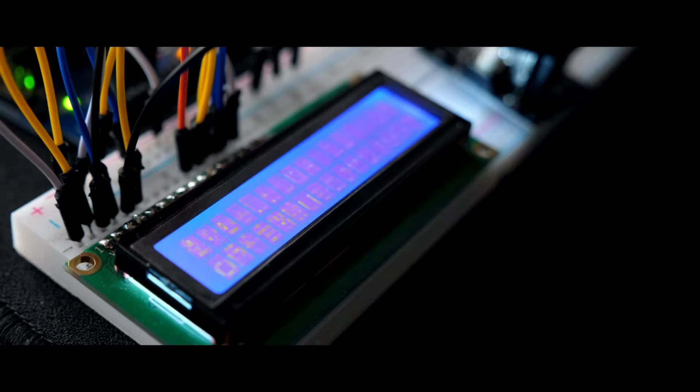Today I'm going to present the circuit of the system. To create the smart contactless mailbox circuit, we need to use a few components. The main one is the Arduino Uno. Then we need to use breadboards. In this circuit, we will use 3 breadboards. Now for the input of the system, we will use an ultrasonic distance sensor, a push button, and a 250 kilo ohm potentiometer.

Next, for the output, we need to have 5 servo motors, an LCD 16x2, a piezo buzzer and LED lights with 2 colors. To ensure all the components can function well, we need to have 3 pieces of 1 kilo ohm resistor, 2 pieces of 160 ohm resistor, 2 pieces of 10 kilo ohm resistor, and 1 piece of NPN transistor. All the components will be connected to the Arduino using jumper wires. For the power source, we need to prepare a 9-volt battery with the battery holder.

The total cost of the circuit is around RM104.90. But usually, we can get all the components in one set like this, at a cheaper price. Basically, the price of the set is 60 ringgit. Next, let me show you how to install the circuit. These are all the components that we use in our circuit.

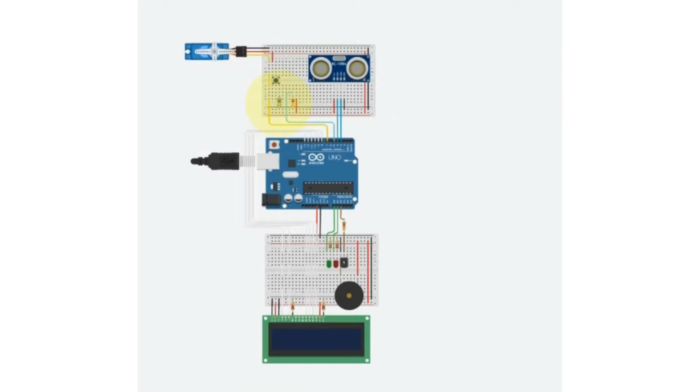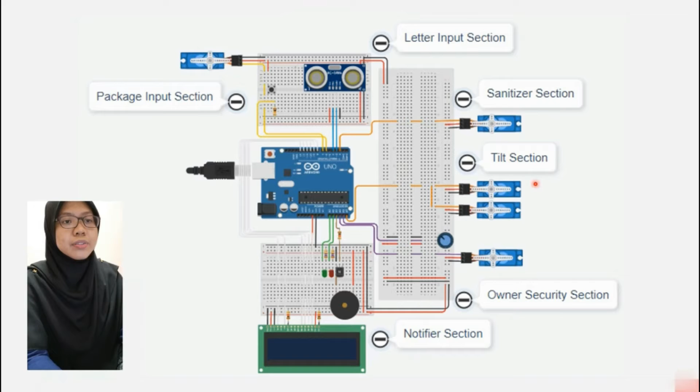Okay, now we can proceed to the installation of the circuit. As we can see here, the smart mailbox system is divided into 5 main sections. We have the input section, sanitizer section, tilt section, owner security section, and notifier section. The input section is divided into 2 subsections, which are package input and letter input. The package input is equipped with a servo motor attached to digital pin 7 and a push button attached to digital pin 6 and a 10 kilo ohm resistor.

So the other input is the letter input section, where an ultrasonic sensor attached to digital pins 3 and 4 will detect the presence of the letter. This sensor will be put near the letter slot.

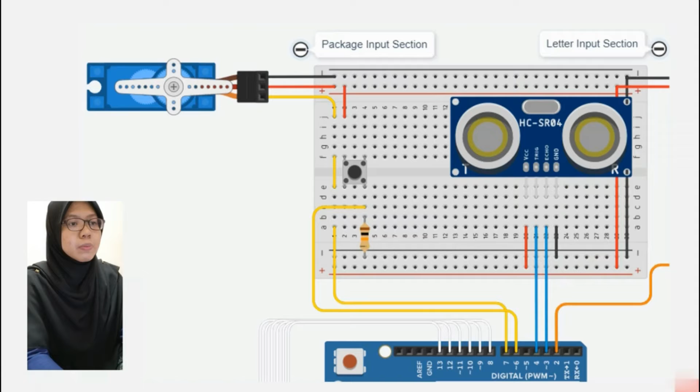Next, the notifier section. We use 3 types of notifier, which are LED light, piezo buzzer, and LCD. There are 2 LED lights used, a red LED and a green LED, attached to analog pins A1 and A0 respectively. Both LEDs are connected to a 160 ohm resistor.

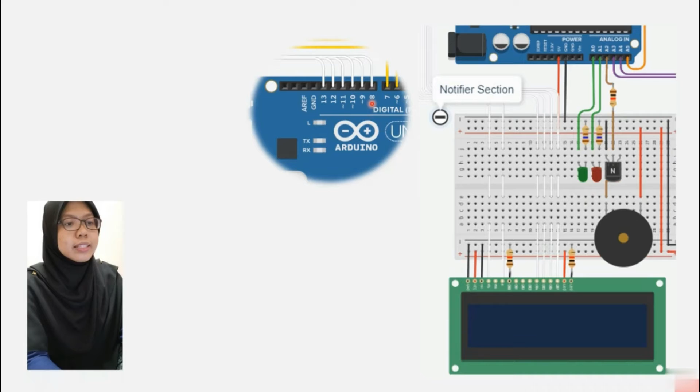Meanwhile, the piezo buzzer is connected to analog pin A2 with a transistor and a 1 kilo ohm resistor. The third one is the LCD, connected to digital pins 8 until 13. Then we continue with the sanitizer section and tilt section. For both sections, we use servo motors connected to digital pin 2 and analog pin A5 respectively.

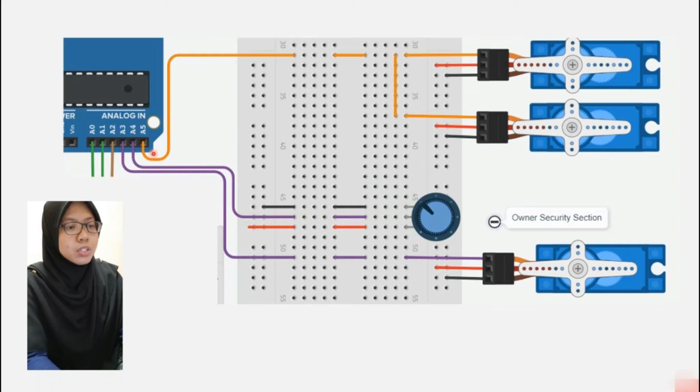Last but not least, the owner security section that will be installed in the lower compartment of the mailbox. The servo motor that acts as the lock is attached to analog pin A3, and the potentiometer that acts as the key slot is connected to analog pin A4. So let's see the full installation process of the circuit.

After that, we continue with the setup. We need to clarify the input and the output. Just to promote our system, the LCD will display the project name when the system starts. Then we go to the void loop, where the loop function will run over and over again as long as the system is on.

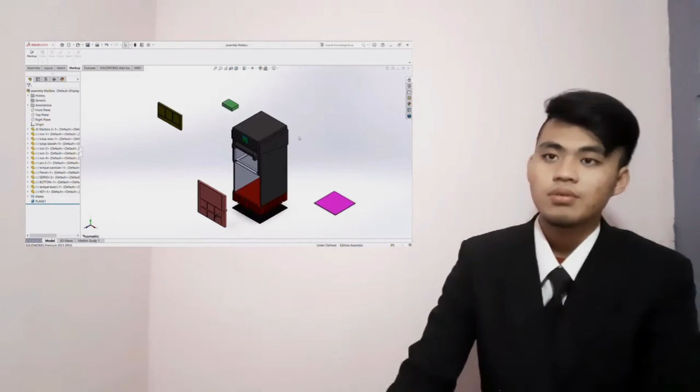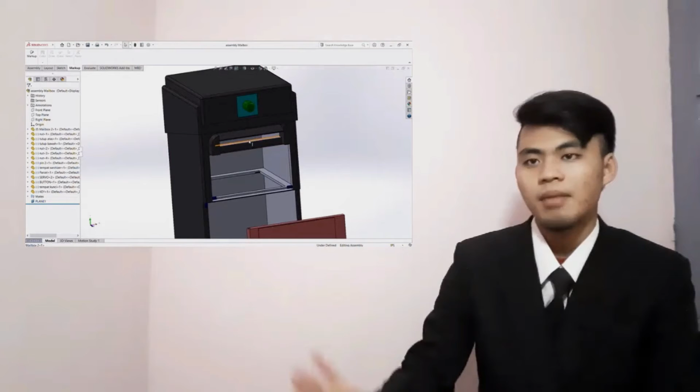The mailbox was designed like this to give the user modern looks and to ensure the postman has a place to deliver not only letters but also small parcels. It was built mostly from steel to ensure its toughness, and it was colored in a dark color.

The upper part was built for the postman to put in the letter and the small parcel. This is the part to put the letter, and this is the part to put the small parcel. The mailbox can be mounted to the ground because there is a screw part below the mailbox, so it will not move, as you can see.

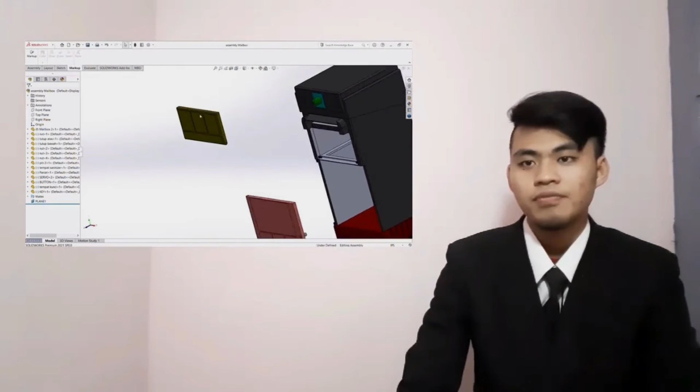The upper cover was made of plastic and steel, and it will automatically open when the button is pushed. The button will be pushed and the upper cover will open. The sanitizer placement was made of steel to prevent someone from breaking it and taking the parcel from the safety box.

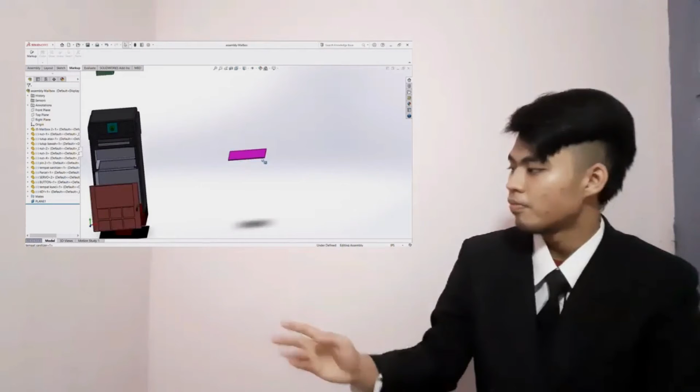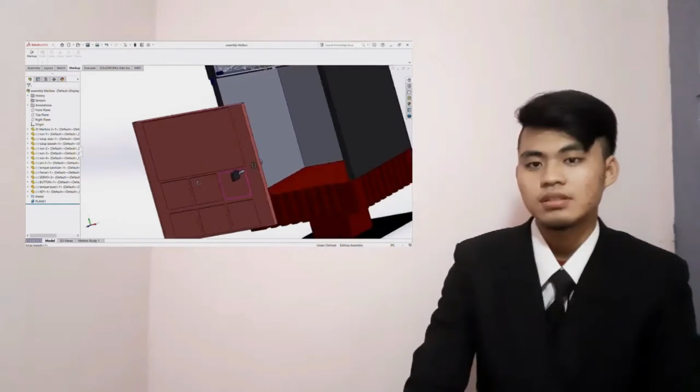Okay, this is the sanitizer placement, and this is the safety box. This was designed to ensure that the parcel and the letter will be sanitized before they get into the safety box.

For the lower part cover, this was made of steel to ensure the safety of the items inside the safety box. The only way to open it is by using this key. You can see this key.

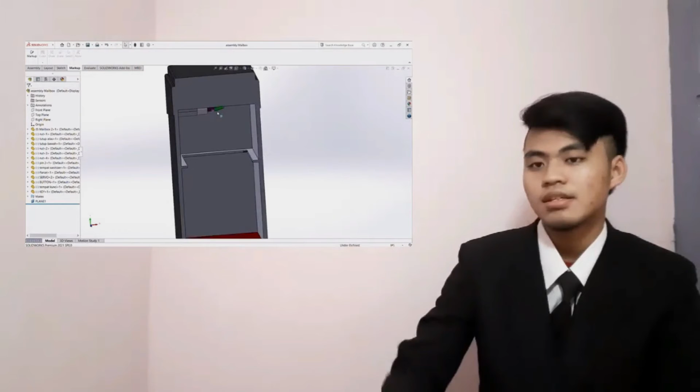Now we will use the section view to see the sanitizer and the servo that is used to push the sanitizer button. And this is the sanitizer bottle. We can change it if the liquid is empty. Okay, that's all.

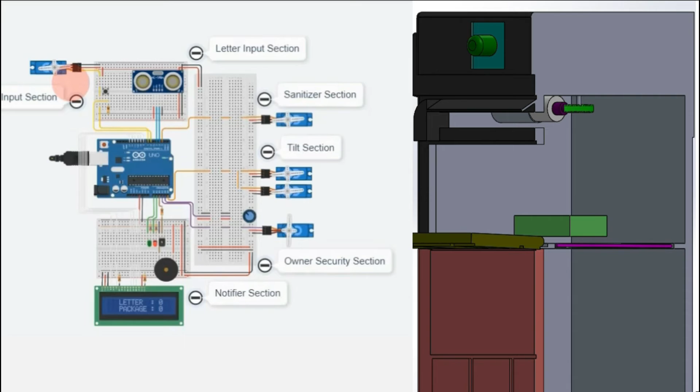So to see the whole process, we need to have an input. Let me show you the package input first. Okay, we need to push this button. Then you can see here the servo lock of the upper compartment will turn to 0 degrees, which means unlock. And it will stay unlocked for a few seconds to allow the delivery guy to insert the package.

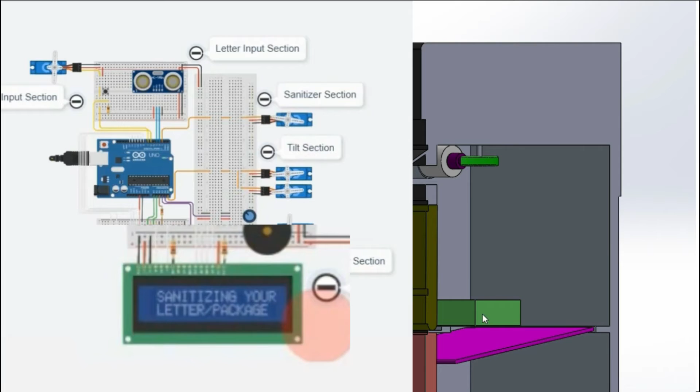So when time's up, the servo will lock back and the notifier section will take place. So after a few seconds, we can see here the sanitizing process will take over. The servo will push the sanitizer spray while the LCD will tell the owner that the sanitizing process is in progress. So after sanitizing, the servo in the tilt section will turn to 90 degrees to help the divider of the mailbox to tilt and move the items in the upper compartment to the lower compartment.

Okay. We can see here the LCD will display that one package is already delivered. The next item delivered is in the form of a letter. So for the letter input, the delivery guy doesn't need to open the upper compartment because we already provide a letter slot. So when a letter is going through the slot, the ultrasonic sensor will sense an object approaching it. So it will give the input to the other section. The process and the output will be the same as the package before.

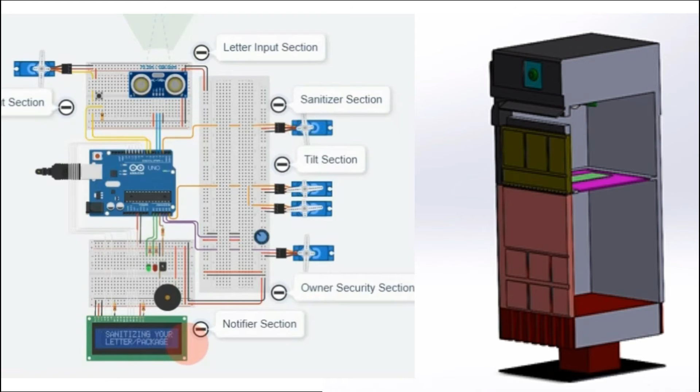So we can see the notifier will notify the user. Then the sanitizing process takes over. And the tilt section will move the items to the safe place. Okay, see, since the item inserted is a letter, the LCD will count the letter as 1. Basically, that is about the circuit in the upper compartment.

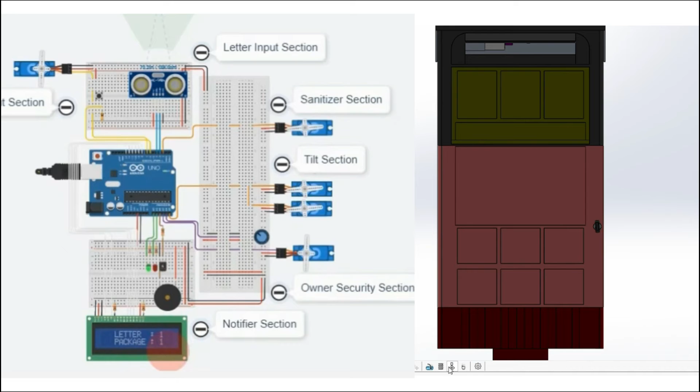Now let's see the lower compartment. It is in locked condition, right? So the owner needs to have the matching key of the mailbox. When the matching key is inserted and touches the potentiometer, the key and the servo lock will rotate, mapping to the rotation of the potentiometer. It will stay unlocked for a few minutes, so it will give time for the owner to pick up the items. Then after the mailbox is empty, the servo will lock back automatically and the counter display on the LCD will reset. So that's all.

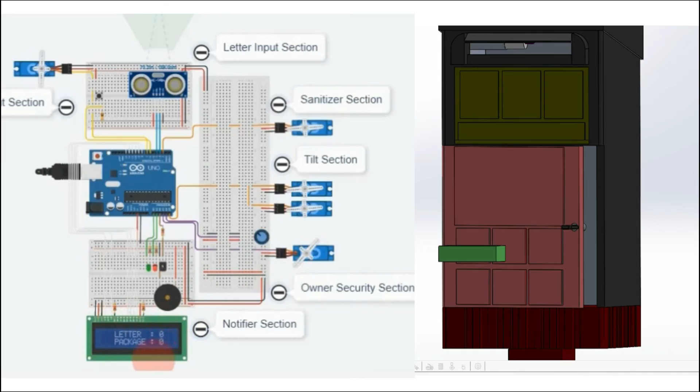Our project Smart Contactless Mailbox is equipped with a smart lock for the upper compartment and lower compartment and 3 types of notification: buzzer, LED lights and LCD display. The delivery man will place the parcel inside the upper compartment and the disinfection process will begin. Then, the parcel will move to the lower compartment, which only the owner with the key can open.

Our product is unique and exceptional from other mailbox services because our product comes with a sanitizer mechanism which will disinfect your packages from pathogenic microorganisms on non-living surfaces, especially during this pandemic. It can also secure your package from snatchers, thieves, or wild animals due to its self-lock specialty.

Do you often find yourself worrying about bad attitude from delivery men, especially when your parcel is fragile? Well, our product can ensure that your parcel is safe from being thrown, which can result in package damage and broken items, by simply asking the delivery man to put your parcel inside the upper compartment of the Smart Contactless Mailbox.